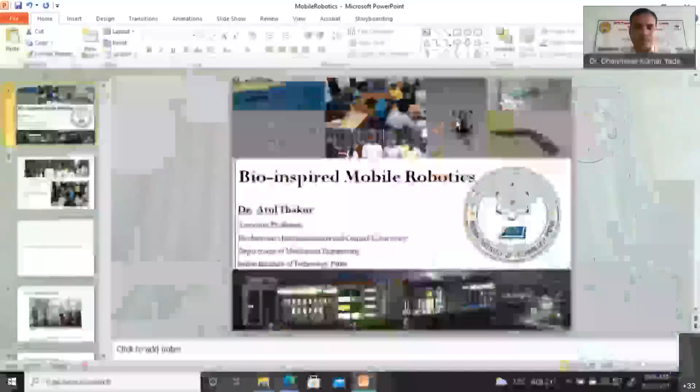A very good morning to all the participants and faculty members. The topic of today's talk is bio-inspired mobile robotics. My name is Atul Thakur and I'm an associate professor in the Department of Mechanical Engineering at IIT Patna. This is my group, and the vision of my lab is to design and fabricate smart, economical, automated robotic and mechatronic systems.

The present projects going on in my lab include bio-inspired robots for municipal solid waste sorting and magnetic micro-robotics, which I will give you some glimpse of today. So before I get into some of the research results from our group, I would like to introduce you to the field of mobile robotics.

Often what we consider as science fiction, in due course as time goes by, becomes reality. I'll give you an example. This is a picture from a 1920 play written by a Czech writer, Karel Čapek. In this play, he introduced some characters which looked like humans but were actually not humans. They were some machines. In those days, there were no concepts of robots. In fact, in that very play, the character that Karel Čapek introduced was called Robota. This word Robota in the Czech language means hard work or slave.

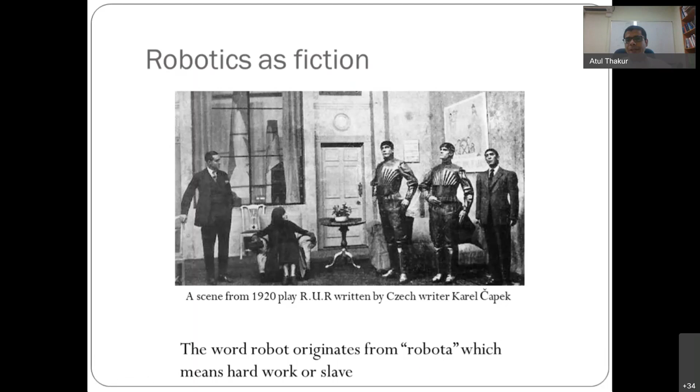It turns out that since then, 100 years have elapsed, and today we actually have some machines which have a human-like figure, which is no more fiction. So what was fiction then now has become a reality.

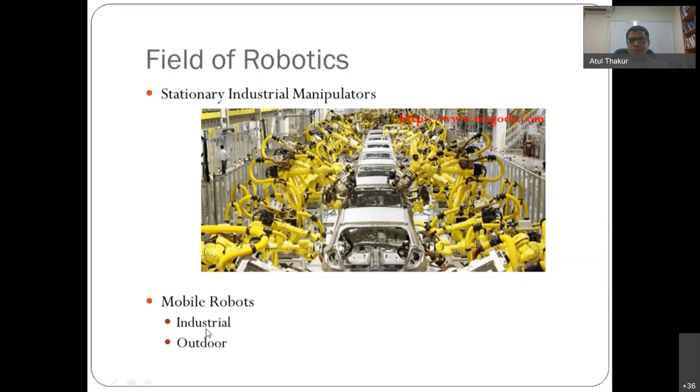They are called mobile robots. Mobile robots also fall into two categories - they can be either industrial or outdoor robots. Today we will be discussing mobile robots. A mobile robot is that robot which can move unsupervised in the real world to perform a given task.

So what do we mean by unsupervised? Well, if we have to give very minimal input or command to the robot, or in other words, if we have to give high level commands to the robot and the robot itself recognizes the low level commands, then we can say that it is unsupervised. To give you an example of that, let us say you have one remote controlled car.

You know the remote controlled car that children play with, those are toys, right? In those toys, you have two controls: one for acceleration in the forward direction, and another for steering, a joystick with which you can steer the wheels. So if I ask you to take that car from one place to another place, it will involve a lot of deft actions.

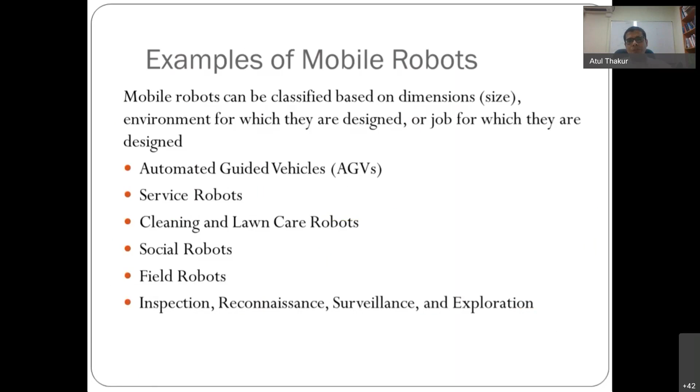So based upon the applications, mobile robots fall into various categories. It can be an automated guided vehicle, service robots, cleaning and lawn care robots, social robots, field robots, inspection, reconnaissance, surveillance, and exploration robots.

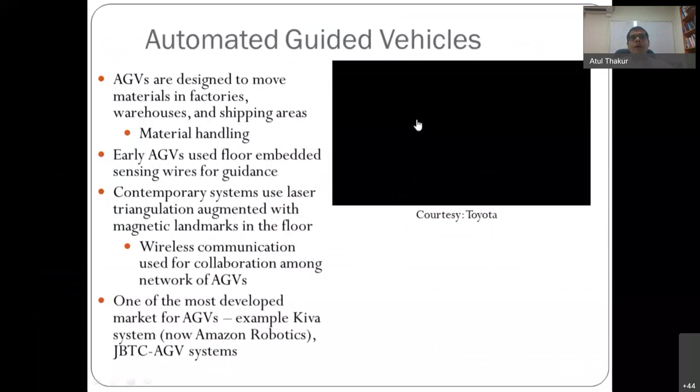So you can see this automated guided vehicle here. These are robots that can move in a factory shop floor and can be used for transporting materials from one place to another place. This is an example of the Toyota plant where you can see these materials being transported on vehicles which are driven by humans.

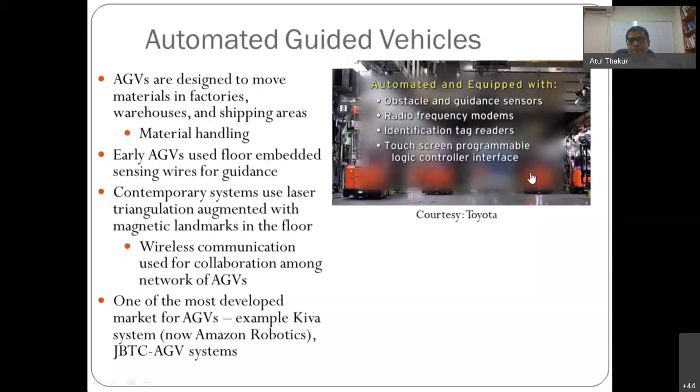But when humans drive these, it becomes much more difficult for them to perform these tasks and maintain that attention throughout the day, right? So instead of them, people are now using these automated guided vehicles where drivers are not driving them, but a computer is driving the vehicle. So these automated guided vehicles can transport materials from one place to another place in a factory shop floor.

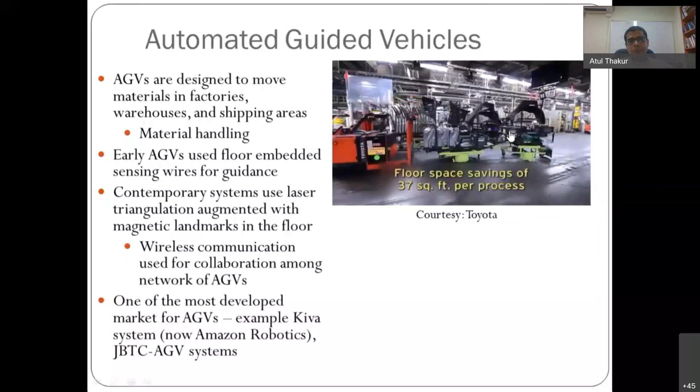In olden days, floor mounted wires or cables used to be used for locating these robots to determine their location. As opposed to that, now wireless localization is being used, which can be done by means of laser-based triangulation.

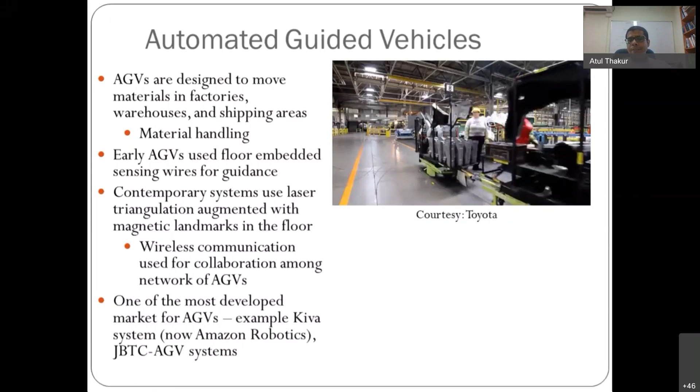So today, these kinds of robots are used in large warehouses for transporting materials from one place to another place. For example, Amazon is using these types of robots in its warehouses, and they have a dedicated wing called Amazon Robotics that does this development.

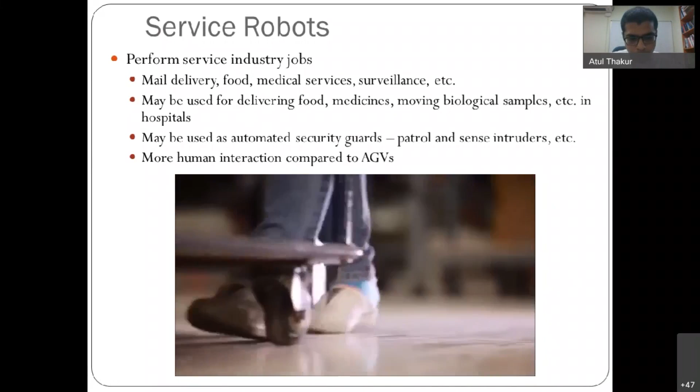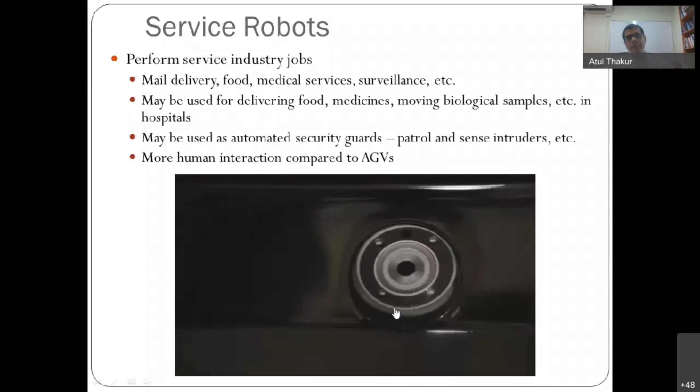Here you can see service robots that can transport materials, not in a factory, but in institutions where more people are working. Compared to automated guided vehicles, these service robots operate in environments where there are large numbers of people. For example, restaurants, museums, or hospitals where many people work. There, these robots can be used for transporting materials from one place to another place.

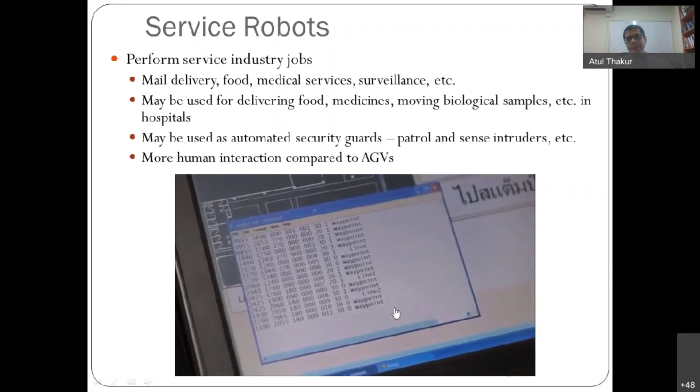So naturally, these robots have to be safer compared to automated guided vehicles. As you can see here, these robots can avoid obstacles, and their geometry is also such that when they collide with humans, there is minimum harm or damage.

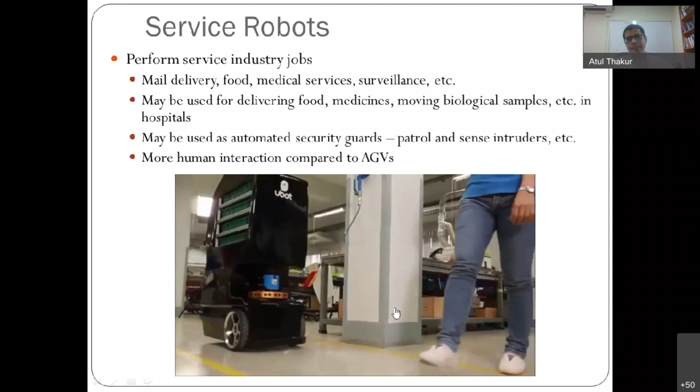It has more sophisticated obstacle avoidance capabilities. You can see that if inadvertently a human being comes in front of the robot, it is equipped with sensors that will stop it. You can see this, right?

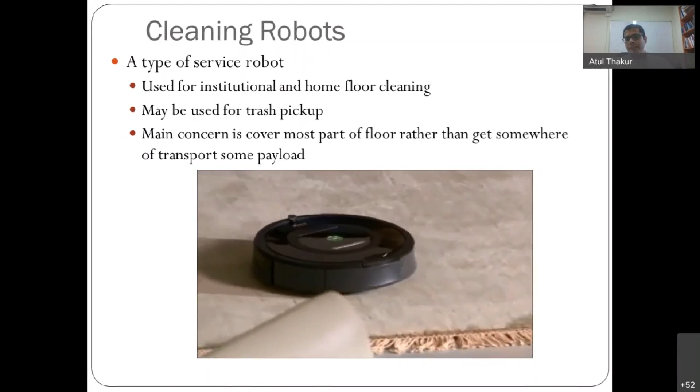Then the other category of robot includes cleaning robots. Nowadays, these robots are also available in India. These are vacuum cleaning robots that can move around in an unsupervised way. So if you give command to the robot for cleaning the room, it will perform scanning of the room, and then it will use its vacuum based cleaning device to suck all the dust.

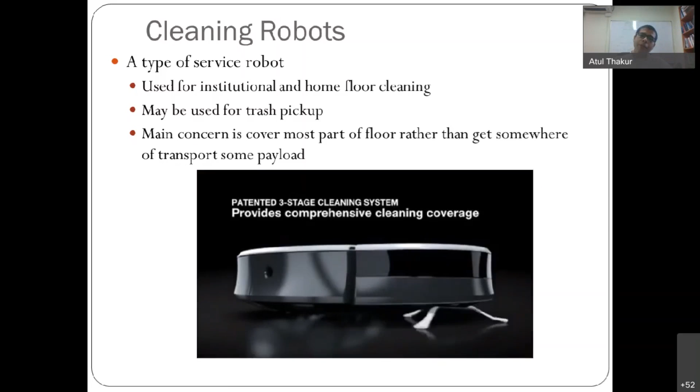Unlike the other category of robots, such as the automated guided vehicles or the service robots, where the target is to take material from one place to another place, here the objective is to cover as much floor as possible in as less time as possible.

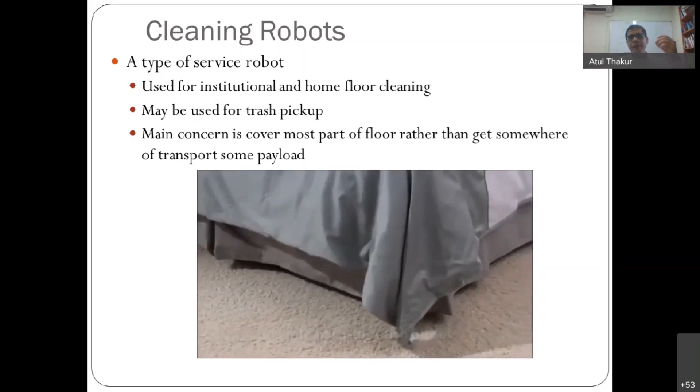So based upon the application, the way we program the robot also varies, right? In the case of service robots, the programming should be done in such a way that it should always avoid obstacles and at the same time take the material as fast as possible to the desired location. On the other hand, in the case of cleaning robots, the job is to perform coverage of a given area.

The other category of robots is social robots. In many countries, the population is aging very, very rapidly. For example, in Japan, a vast majority of population is getting older. So there, in order to provide care to the elderly population, robots are being used.

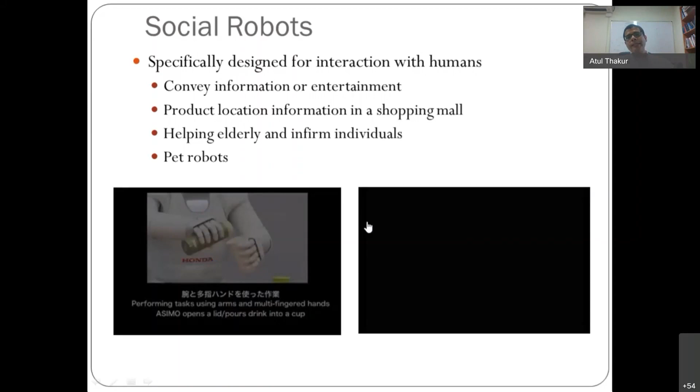These robots have to have a shape which looks much more like human, so that humans can easily interact with these robots. When we are talking about dealing with humans, there should be some kind of human interaction with the robot, and social robotics area is being developed keeping that in mind, where the robots can have human-like shape, they can have human-like movements, and sometimes even human-like gestures.

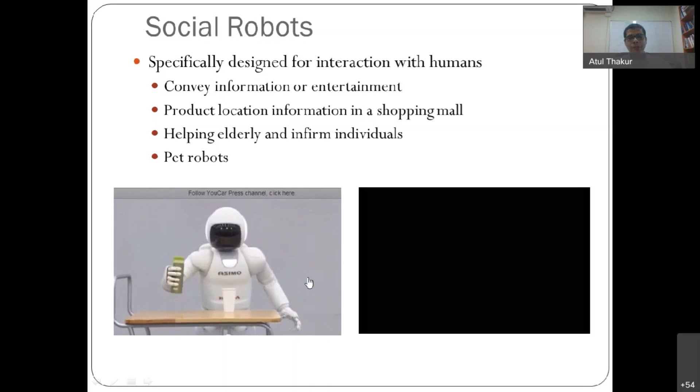As you can see that this robot, although it has a human-like shape, you can very easily tell that it's a robot, right? Because of its very robot-like motion. So nowadays, people are working on developing robots which are looking more and more like humans. There is a lot of need for research in this area.

Sometimes for entertainment purpose, these kind of robots are also developed, which can act like pets. This AIBO robot on the right hand side is a robotic pet.

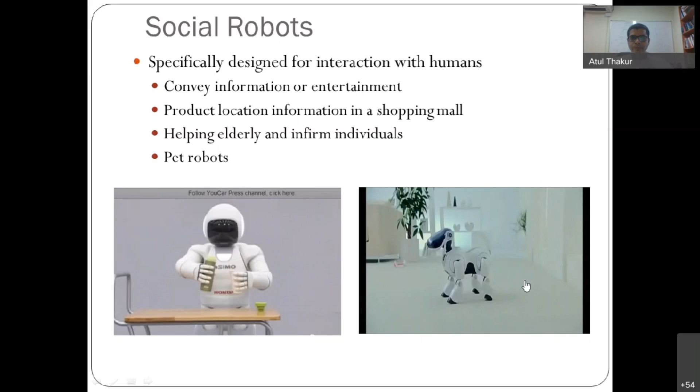So these are all robots that I have shown you, basically operating in a regulated environment. By regulated environment, what I mean is that we know about the environment. For example, if there is a pet robot, then it is operating in a domestic home-like environment, so we know what kind of obstacles are around it and what kind of surfaces are there. Or if we are talking about a factory automated guided vehicle, AGV, then we know the factory environment, right? We know what kind of floor is there and what kind of temperatures we are talking about and so on and so forth.

However, there are environments where we don't know about the environment. The environment is unregulated, for example like interplanetary exploration. We don't know about the Martian surface. So the robot should be able to take care of unknown dangers that may be present on a different planet.

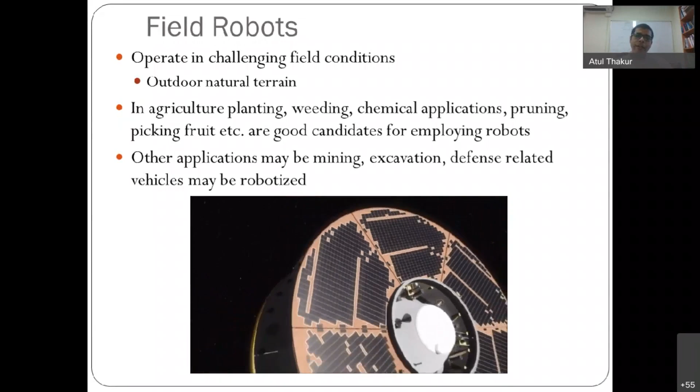It's not only about the interplanetary environments, but suppose there is an agricultural field where the robot is used for applying chemicals or disinfectants or pruning or picking fruits. There also the environment is primarily unregulated. We don't know the terrain, we don't know the softness of the soil and so on and so forth. Or in mines, for example, the environment is primarily unknown.

So all these types of robotic applications are known as field robotics applications. In field robotics, the way robots are programmed should take care of unknown environmental factors such as terrain, wind, unknown obstacles, moving obstacles, and so on and so forth.

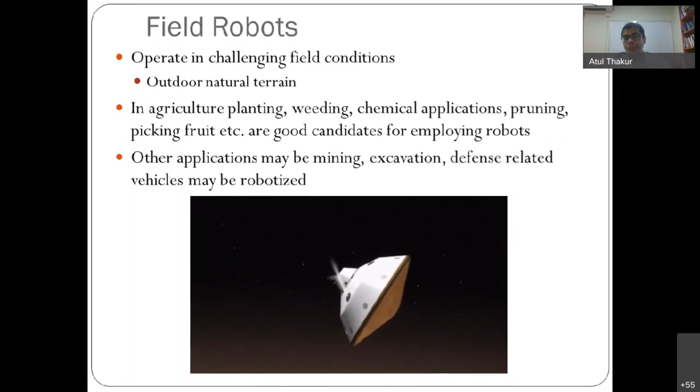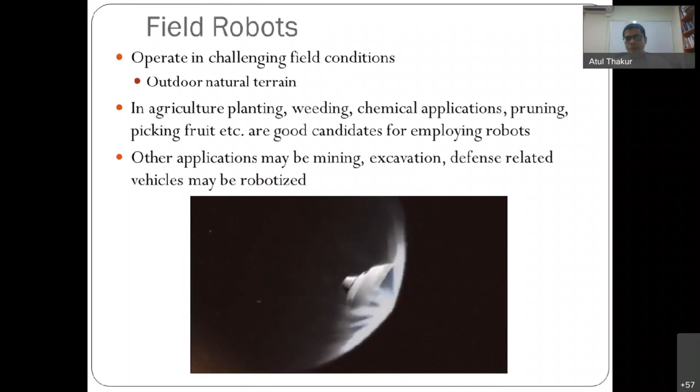Here in this animation, you can see the Mars rover which enters the Martian atmosphere, and eventually the rover lands on the Martian surface and starts exploring it. Obviously this is not a real video, it's more of an animation to give an idea of what is going on. But now we have available all these pictures from Mars sent by the Martian rover. This is how it might have fallen.

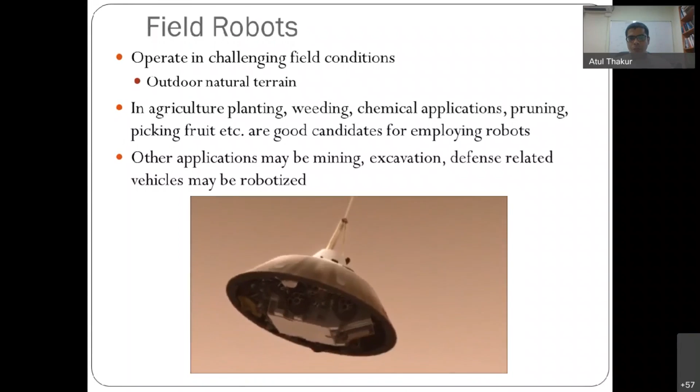So once this rover lands, there is no idea about what is the environment. In fact, the whole purpose of the rover going to the Martian surface is to find out what is there, right?

Now, you can imagine that the distance between Earth and Mars is very large. It's of the order of a few light minutes. That means that even light takes tens of minutes to go from Earth to Mars, and so do any other electromagnetic signals.

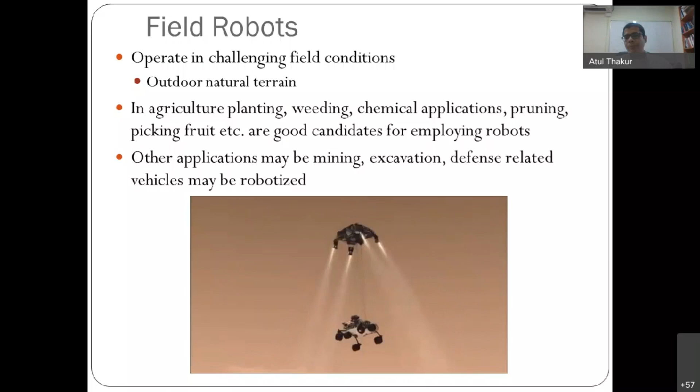Suppose that we want to operate this rover via remote control. By the time we give a brake command, the robot might have already fallen into a ditch. Therefore, the robot should be programmed with autonomous behaviors.

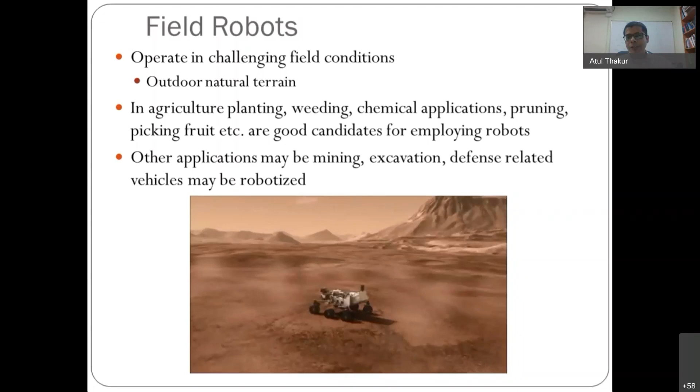From Earth, we should only be sending commands that are high level, meaning scan this area without falling into a ditch. The robot should be able to go around and protect itself from ditches, marsh, or any kind of soft terrain where its wheels may get stuck.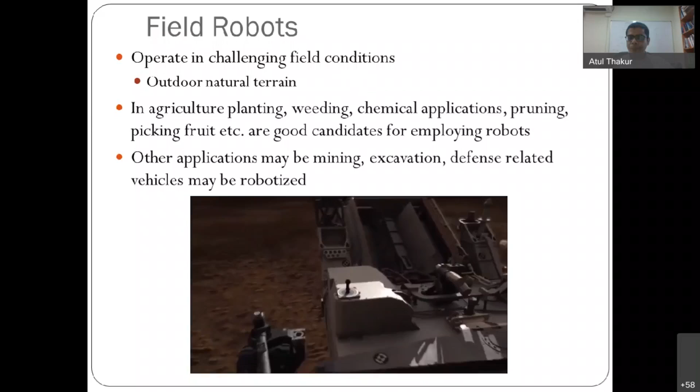It should also take pictures, and since it gets charged by solar power, it should seek places with high sunlight when the battery is draining. All these behaviors are programmed on the robot.

In a nutshell, mobile robots have three layers, or basically two layers plus the environment as a third. There is the software layer, which includes control, planning, mapping, and localization, and the hardware layer, which involves the robot structure, actuator, microcontroller, and sensor, and that interacts with the environment.

The robot structure is the overall structure of the robot, meaning whether it has wheels or legs, and what kind of shape and physical components it has. Actuators are parts that provide mechanical power to the robot structure, such as an electric motor that makes the wheels rotate, or a hydraulic or pneumatic actuator. Microcontrollers are hardware pieces that generate signals to make these actuators move.

Sensors are pieces of electronics that sense environmental effects, for example the inclination, the battery voltage, the temperature, and so on. Once this data is available from sensors and goes into the microcontroller, it has to be processed to generate a suitable signal for the actuator, and that processing is done by the software layer.

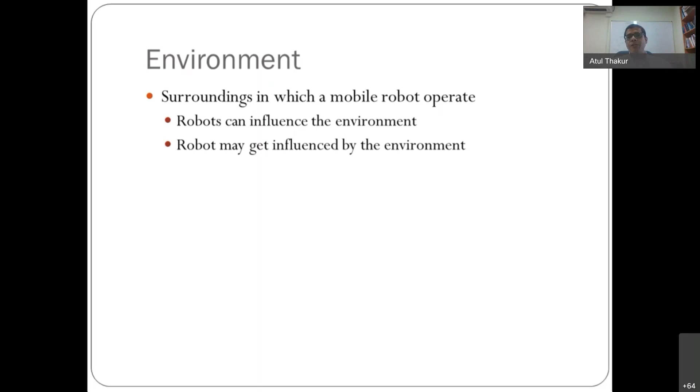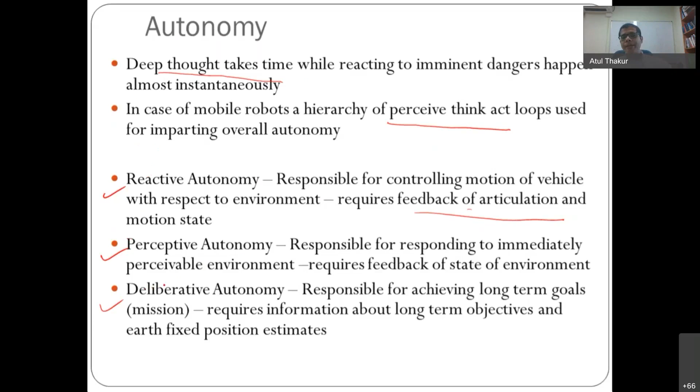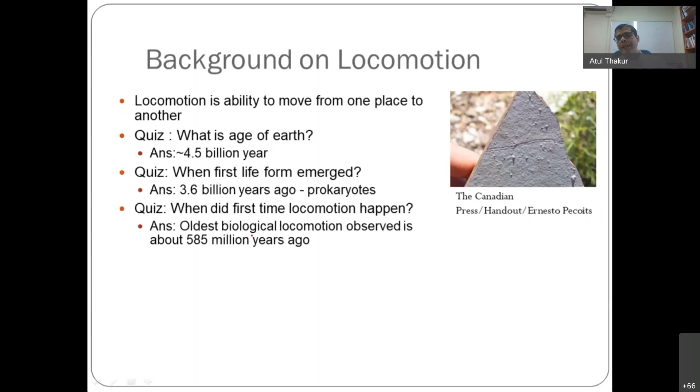Now let us look at robot locomotion. The Earth's age is about 4.5 billion years, and the first life form emerged about 3.6 billion years ago. Locomotion took place about 585 million years ago. In between, there was a process of evolution, and in these 585 million years, creatures evolved swimming, flying, crawling, and different kinds of locomotion patterns.

Humans invented wheels only a few thousand years ago. So it makes sense that since nature has evolved locomotion over 500 or 600 million years, we should take inspiration from the shape or body structure of creatures to develop robots or machines.

However, we cannot exactly copy animals or creatures because their mechanical complexity is very high, and creatures are made up of self-replicating cells, which we cannot make in labs. Moreover, the energy generation and storage mechanisms in biological systems cannot be replicated in machines.

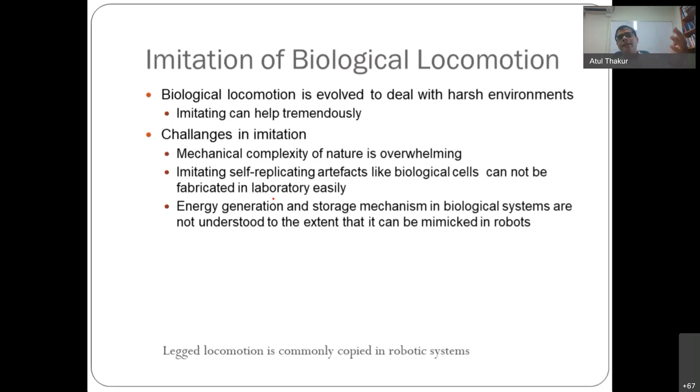Think about a small fruit fly, the one you see when you cut a fruit and leave it on the table. Even that small fruit fly can perform its own locomotion. It can get glucose or food from fruits and produce its own energy. On the other hand, the machines that humans develop have batteries, and the battery size is quite big, the form factor is big. So exactly copying creatures is not possible, but we can make a functional copy, and that is known as bio-inspiration.

There are different types of locomotion in nature used to develop robots. There is terrestrial locomotion like walking, galloping, running, hopping, crawling, sliding, etc. There is aquatic or waterborne locomotion like swimming and jet propulsion, and flight locomotion like flapping wing, gliding, and perching.

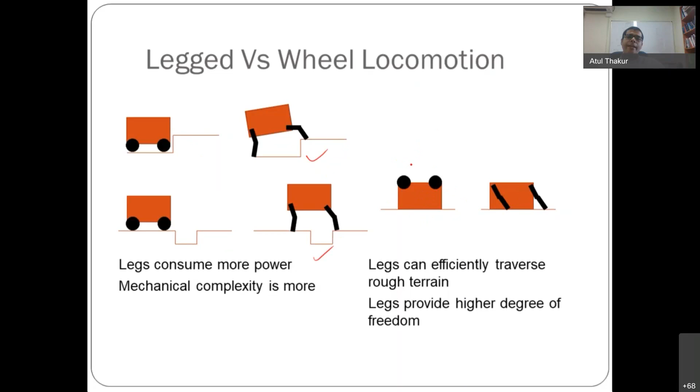So legged locomotion can go on uneven terrains like this, but wheel locomotion cannot. Wheel locomotion may not be able to recover from an upturned state, but legged locomotion can. However, wheel locomotion is more efficient, consumes less energy, less power. On the other hand, legged locomotion consumes more power.

If we look at an insect, as soon as it is born, it starts walking. If you look at a deer, it starts standing about 20 minutes after its birth. And humans, as you all know, take 1 to 2 years to start standing and walking. Why is that? An insect has 6 legs, so with 6 legs it can easily stand without any effort. It is more stable, statically stable, so to speak.

On the other hand, a deer is also almost statically stable, but it has lots of controls, muscles that it has to learn to control. Humans stand on 2 legs, also known as biped, which requires much more control effort that humans have to learn over 1 to 2 years. But with fewer legs, humans can perform much more complex motions, like gymnastics, pole vault, and other things you don't see insects or even quadrupeds doing.

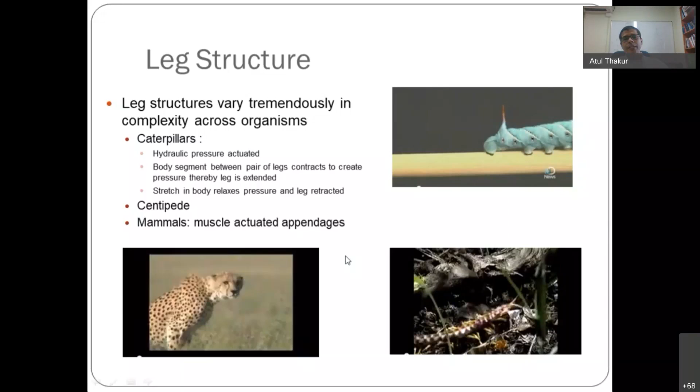On the other hand, we have the cheetah, which has a more complex quadruped structure, and all these legs are moved by means of muscles. It can gain a maximum speed of almost 80 miles per hour, and at that speed it can perform lots of complex motions. Then we have creatures like a centipede, which moves with hundreds of legs, but each leg performs a very simple motion.

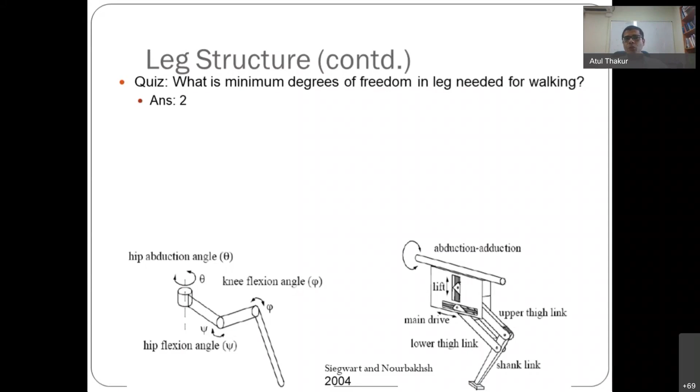In general, the minimum degrees of freedom in a leg needed for walking is 2: one for lifting, another for swinging. If we look at our own legs, they have more degrees of freedom than 2. For example, at the ankle, at the knee, and also at the thigh there is a degree of motion. That's there for additional control, for higher maneuverability.

But the more degrees of freedom, the more the mass increases, control effort increases, energy requirement increases, and design complexity increases. In general, legs can be designed with revolute joints or slotted joints, so this goes up and down and this goes sideways, and that way the leg can be controlled, or both joints can move in a rotary manner.

Now I'll show you some robots that copy biological locomotion. Here you can see hopping. As such, you don't see hopping directly in nature, but you might have seen kangaroos which hop on their rear legs, or small children who join their legs and hop around. This robot actually performs that kind of locomotion.

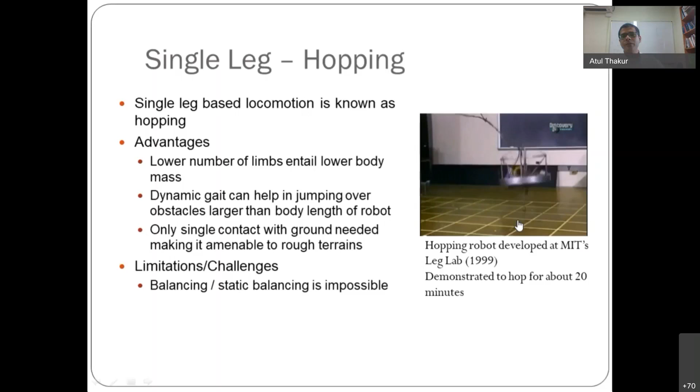So here the mechanism works like this. You have this projection on a wheel which rotates and stretches this elastic component and stores the elastic energy. And at the extreme, this is released, and because of that, the hopping motion is generated.

So with this kind of hopping motion, only a single point of contact is needed with the ground, which helps in jumping over uneven terrains. However, static stability is not possible. That means this robot cannot stay without moving.

It has to keep moving to stay. So these are bipeds, like Honda Asimo, which I have shown you in the video. It has two legs, and with these two legs, it can move around. Or we can have multi-legged locomotion. Here you can see these legs, out of which some legs are in contact with the ground while some are off the ground.

You can observe that a minimum of 3 legs are needed for stability. That means there should be 3 legs in contact with the ground so that the robot can be statically stable. So here you can see these 3 legs or 3 points of contact. If you connect all these points of contact, what you obtain is called a support polygon.

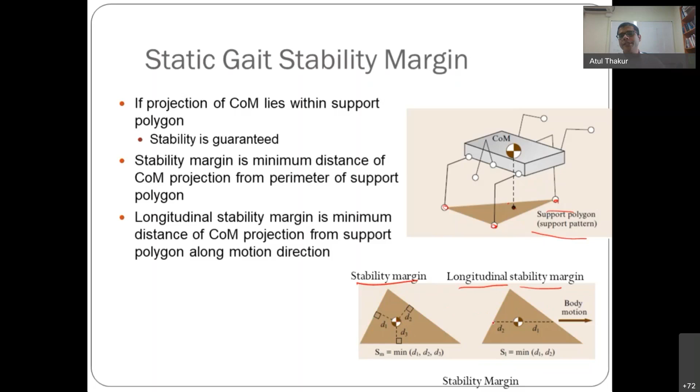If the stability margin is more, the robot is more stable. If the stability margin is less, the robot can be easily made to fall. We can also define longitudinal stability margin. When the robot moves, we can find the direction of movement, and along that direction, the shortest distance from the edge is called the longitudinal stability margin.

So quadruped robots: quad means 4 and ped means legs. So if a robot has 4 legs, it is called a quadruped. A minimum of 3 points of contact are needed for static stability, so you can imagine these can be statically stable.

However, please note that when the leg is lifted up, the center of mass shifts. So the posture of the robot has to be changed in such a way that the projected center of mass is always guaranteed to lie inside the support polygon.

So suppose this triangle is the support polygon that I'm showing you. Then the programming of the robot should be done in such a way that its center of mass, when projected onto this plane of the support polygon, is always ensured to lie inside the support polygon.

So this is a representation of the gait of the robot. Please note that this is not G-A-T-E gate, this is G-A-I-T gait. So gait means how the robot's legs move basically.

So here you can see this diagram which shows the legs of the robot. The empty bubbles mean that the leg is off the ground, that it is not touching the ground but above it. And when this bubble is filled, we say that particular leg is on the ground.

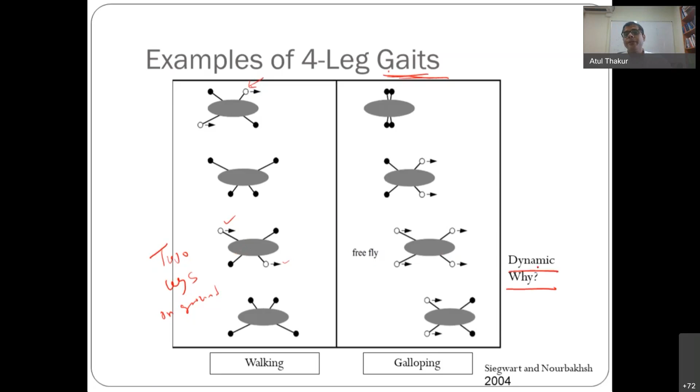Here you can see another type of gait where the front two legs are above the ground, then all the legs are above the ground, meaning it is completely in the air. Then the front two legs are on the ground and rear two legs are off the ground. Finally, all the legs are on the ground, and this cycle continues like this.

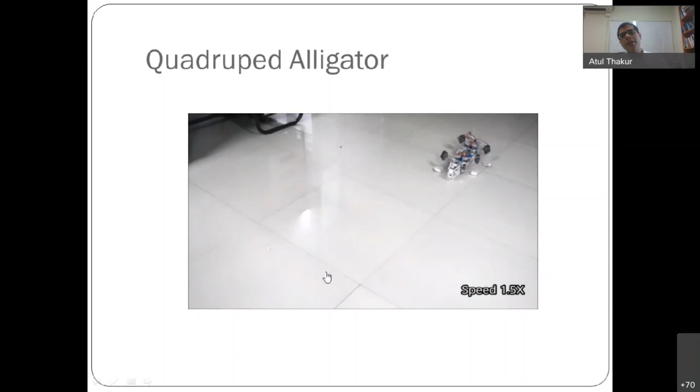Here you can see one example of an alligator robot developed in our lab. This robot is able to move on the ground. It can turn around, and so on and so forth.

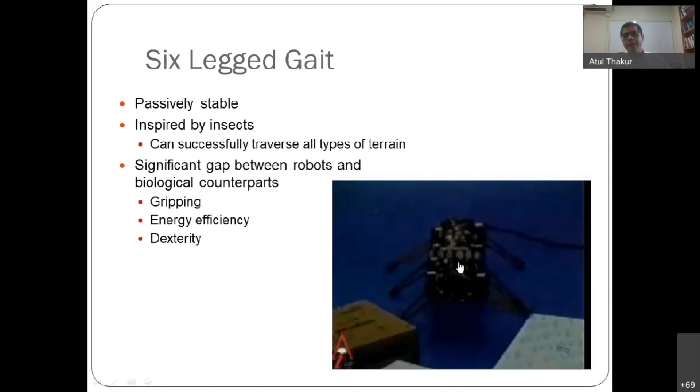Then these are six-legged gaits. Here a robot has 6 legs, and with 6 legs it is able to climb more uneven type of terrain. With 6 legs at a time, minimum 3 legs are always on the ground, so it is a statically stable gait, also called a passively stable gait. This kind of locomotion you often see in cockroaches, where they have 6 legs and 3 legs are always in contact with the ground.

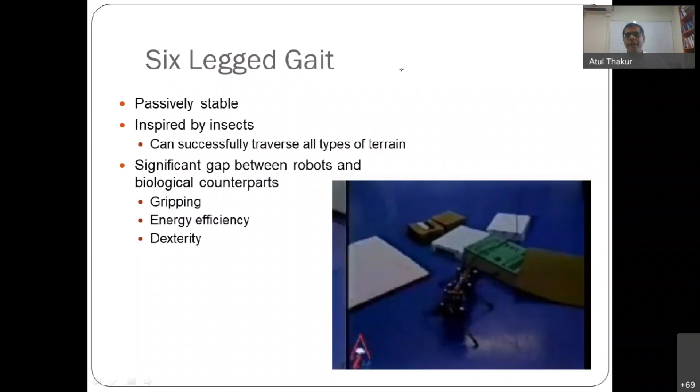So suppose we have the 6 legs. You can see that the middle leg on one side and the front and rear legs on the other side are in contact with the ground, and then all of them are in contact with the ground, and then it is swapped. Here you can see the swapping. So this is a 6-legged gait.

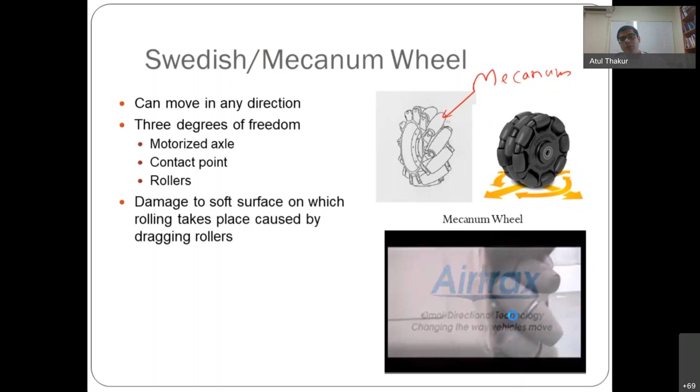Then we have the Swedish wheel, also called a Mecanum wheel. This is similar to a standard wheel, except that on the periphery of this wheel there are these rollers known as Mecanum wheels, which you can see over here also. These are passive rollers, meaning they are not moved by a motor, but because of this, the robot or vehicle is able to go in any direction.

You can see that this can even slide sideways. The only limitation of these kinds of wheels is that it is more complex, and it can damage surfaces because of the presence of the rollers.

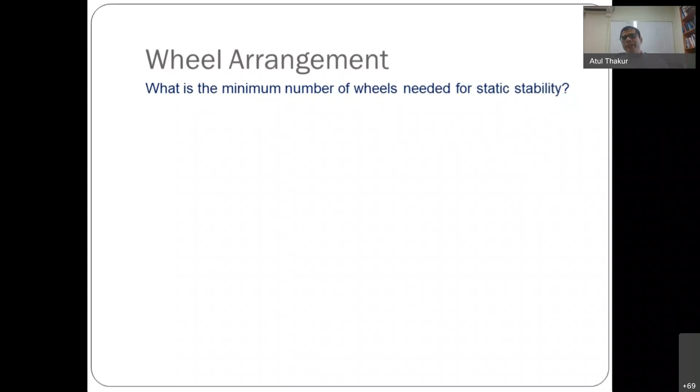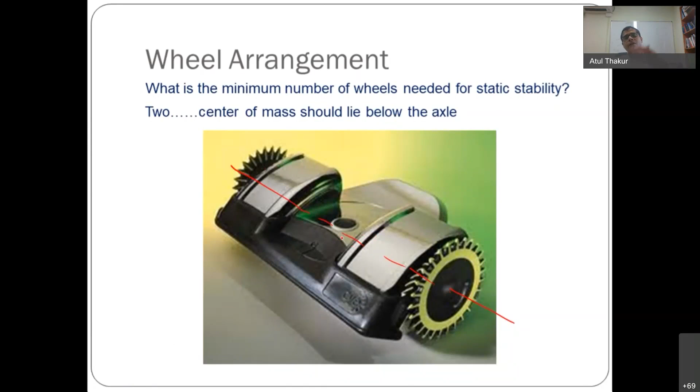So what is the minimum number of wheels needed for static stability? One may think it is 3, but it turns out it can be 2 in a special case when the center of mass lies below the axle. This is an example where there are only 2 wheels, designed so its center of mass is below the axle - axle meaning the axis passing through these wheels. If the center of mass is below this axle, then it will be statically stable.

Omnidirectional drive can have 3 Swedish wheels put at 120-degree phase lag, and with that it can actually go in any direction.

So for static stability of a 3-wheel configuration, the center of mass should lie within the triangle formed by the contact points between the wheels and the ground.

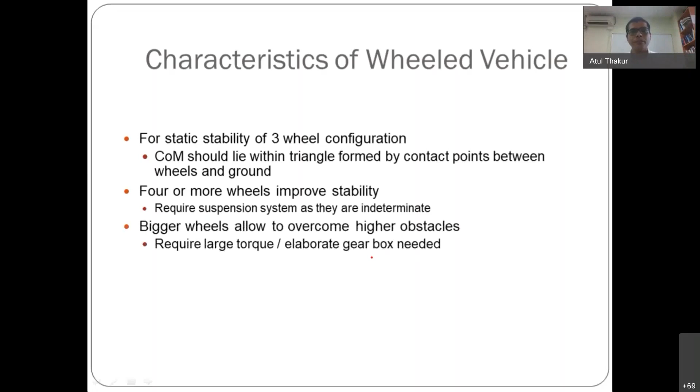If there are bigger wheels, then higher obstacles can be overcome, but it requires larger torque and an elaborate gearbox. More arrangements—most of the arrangements are non-holonomic.

That's something beyond the scope of this 2-hour lecture right now. But non-holonomic constraints involve some non-integrable constraints, and most of these wheeled systems will have non-holonomic constraints that make control a little involved.

So if we combine actuation and steering on one single wheel, then we say that the vehicle is under-actuated. It requires more complex control scheme.

So what we have seen is that if we use legs in a robot, it can go on very complex terrains. But legs provide poor efficiency, or higher power consumption.

Wheels move uniformly, therefore giving better efficiency. However, they cannot go on all types of terrains. For example, wheels may get stuck in sand, or may not be able to go on highly uneven terrains.

So can we get the best of both worlds? It is possible by using rovers. So here you can see a rover.

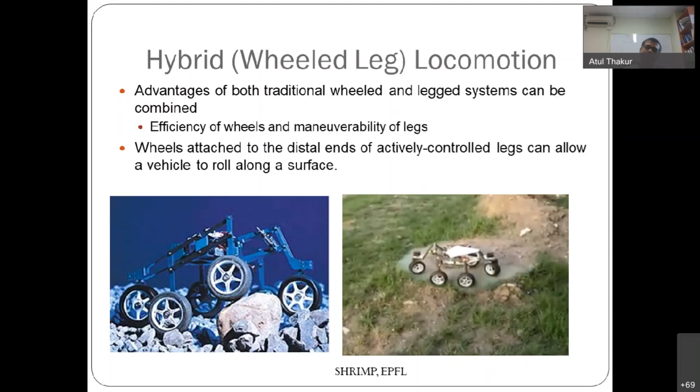Well, in engineering there is no free lunch. If you are improving in terms of efficiency and terrain traversability, then you are doing worse in terms of design complexity.

With that, rovers are more complex to design actually, and will be more expensive. So that's the reason they are used mostly in applications where funding is not an issue.

For example, the Mars rover. You just want to send one Mars rover to the planet Mars at this point of time, so a space agency has a lot of money and can spend it on this kind of sophisticated locomotion. But you cannot have a car built this way, because many of them have to be manufactured.

So now let us look at crawling-based locomotion and the corresponding robots that have been developed, keeping in consideration crawling. Snakes and worms perform crawling-based locomotion.

Snakes are vertebrates. They have 100 to 400 vertebrae. You can see this vertebral structure here. In fact, it has a very long body, but it has only 3 types of bones: skull, vertebra, and ribs, although there are a lot of them.

So the stretchability of the backbone is very less actually. They are not elastic, but they are very flexible.

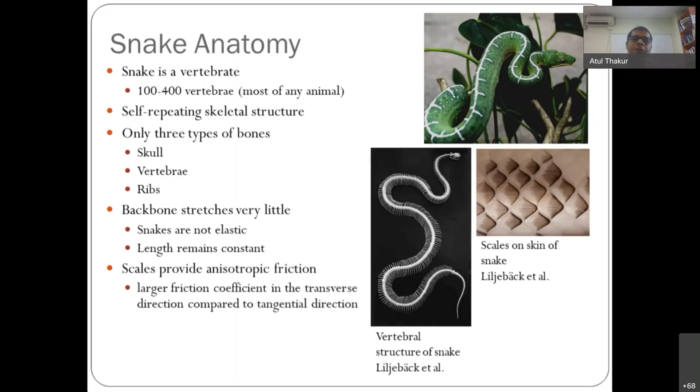Snakes use various cyclic forms of locomotion like lateral undulation, concertina, rectilinear, and sidewinding, and then there are others like slide pushing, jumping, rolling, climbing, swimming, etc.

This S-shaped wave moves from head to tail, and it keeps on happening. If we take a very small element of this snake's body and pay attention to the friction force experienced by it, the normal reaction is perpendicular to the ground. So the friction force will have two components: one along the body, and another perpendicular to the body or perpendicular to this element.

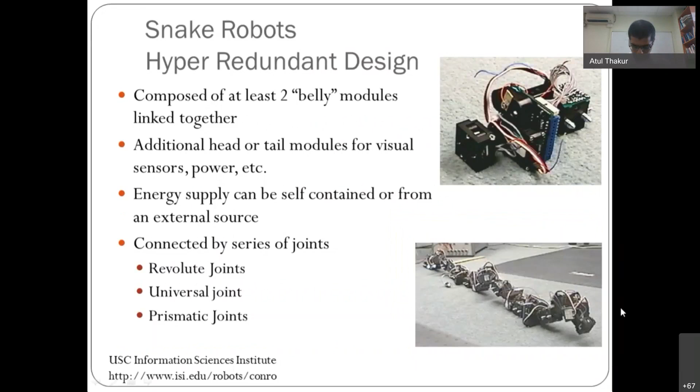So here you can see the concept of hyper redundant design. What do we mean by hyper redundant design? What is the meaning of the word redundant? Redundant means something which is more than necessary.

For example, let's say there is this frame of reference, and in this frame of reference suppose I want to put a point. How many variables do I need to describe this point? Well, I need x, comma y - two variables. So it has 2 degrees of freedom. You can imagine this point to be like an ant, which can move along the x-axis or y-axis or a combination, but it cannot rotate if we are looking at a very tiny point.

But now suppose we have one more point, described by x dash and y dash, and both points can move in any direction - then there are 4 degrees of freedom of this system. But suppose we join these 2 points with a line, and say this line is rigid - like two ants trying to carry a long rod. Then because of this additional constraint, there are now only 3 degrees of freedom: 2 plus 2 is 4, minus 1 constraint is 3. And it's true, because you need to specify the location of any point on this line and its rotation theta.

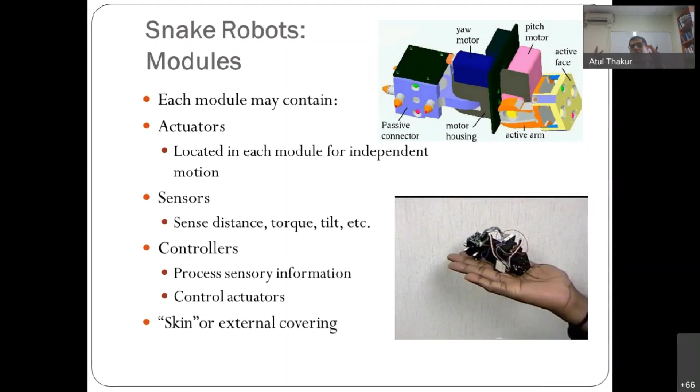And then we have an example of self-reconfigurable robots, where the long snake body can break down and connect in different ways. For example, it can make itself like a legged robot, and so on and so forth.

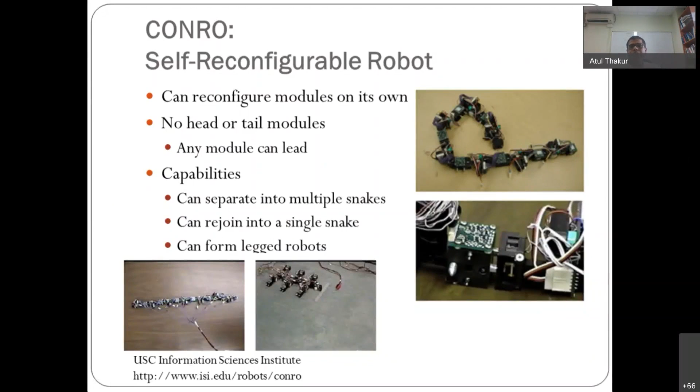So why do people bother developing snake-inspired robots? What is the reason? If you have a scenario where robots have to perform search and rescue in an earthquake, victims may be stuck in some place, and if you move things too much, you may actually harm or damage them. So it's very difficult to search for victims. Therefore, these very narrow snake-like robots can go into nooks and corners and can identify or detect the stuck victims, so that some action can be taken.

Any questions till now? One participant has written a question in the chat box. I think he has written: what is the role of robots in electrical engineering?

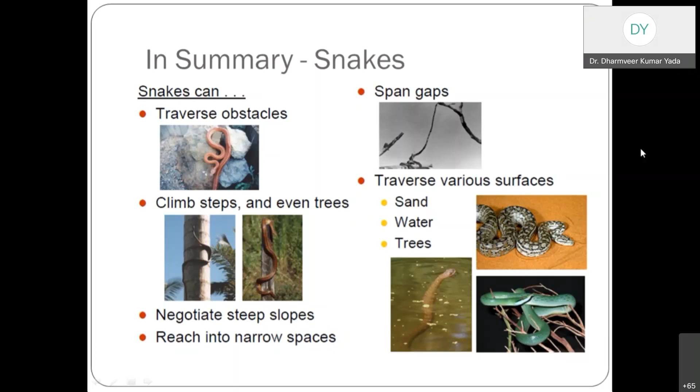Any other participants have any questions? Okay, so then let's try to cover some more material. There's two hours, right? So let's take some more things.

So then there is worm-based locomotion. This means you have seen different types of worms. Usually, this is a very simplistic description, but you can imagine a worm to be like a cylinder. If you stretch a cylinder like this, what happens to the diameter? The diameter will reduce, it will become less. So if volume is written as pi r squared L, then dr by dl will be minus r by 2L. So as the length increases, the radius reduces.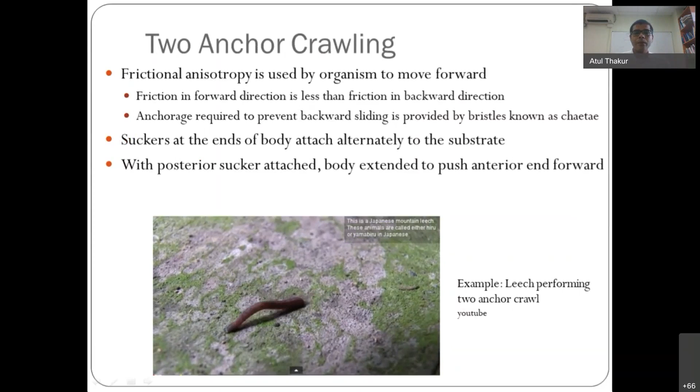In fact, the similar thing is observed in different types of worms. Here you can see an example of two-anchor crawling, seen in a leech - in Hindi we call it a jonk. This has two anchors at the front and at the end, known as suckers. These suckers have frictional anisotropy, because of which the friction in the backward direction is much higher and in the forward direction is less. So what it does is stretch its body - as length increases, radius reduces - then it sticks its front sucker on the ground and contracts its body.

And that is how it performs movement. This is one form of worm locomotion, called two-anchor crawling. Then a caterpillar may show three-anchor crawling. I showed you a video of a caterpillar where there are three anchors - some legs in the middle, one in the back and one in the front. By alternately moving these, the caterpillar can move ahead.

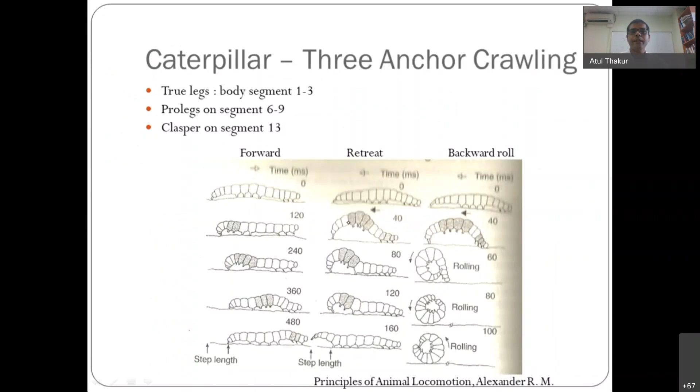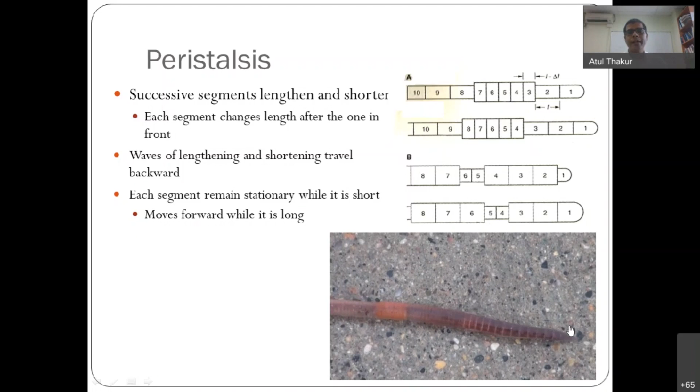Then the third variety of locomotion in worms is called peristalsis, seen in earthworms. Here you can see that a wave of expansion and contraction goes through the body. Let's look at this animation - some of the front segments are contracted, and in between there is stretching of certain segments. This wave of contraction and expansion goes through the body from front to back, and based upon that it crawls, not walks.

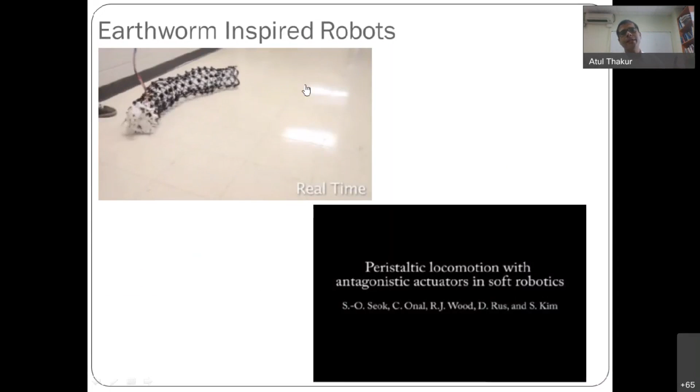So there are various robots inspired by this worm locomotion. Here you can see this earthworm-inspired locomotion - this motor is used, and this special mechanism is made with which the waves of expansion and contraction go from front to back. By means of that, there are points of contact where the friction is anisotropic, with which it can move on the ground and go ahead.

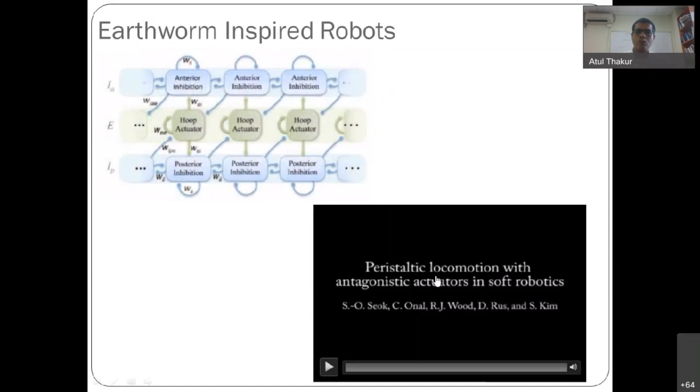Then there is another example of peristaltic locomotion. Here, shape memory alloys are used, so they don't use motors. Rather, they use what is called a shape memory alloy, which are like wires for performing actuation. So it is very robust actually. Unlike motors, there is nothing to break here. It basically actuates by means of wires.

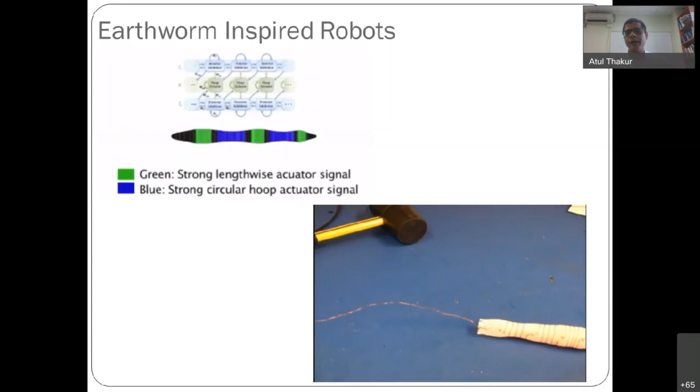Then there are aquatic locomotion. Aquatic means underwater locomotion, so underwater creatures are fishes. If you pay attention to any fish, they have two types of fins: caudal fin and median and paired fins. Caudal fin is like the tail fin, and then there are median and paired fins which appear in pairs. So by means of undulation and oscillation of these fins, the fish can move.

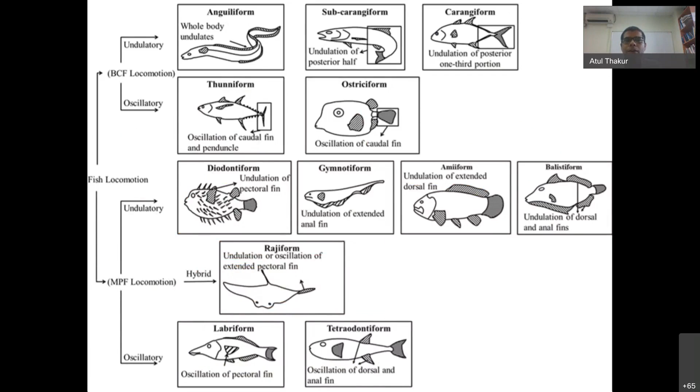So these are various types of locomotion found in fishes, based upon undulation of the body, oscillation of the body, and undulation and oscillation of the median and paired fins. Without getting too much into details of this, let's look at some examples.

This is known as anguilliform locomotion, where you can see that the body is undulating. This is also a kind of fish. The amplitude of oscillation at the head is much less compared to the tail, and these waves go through the body, and by means of these undulatory waves, the fish produces propulsion.

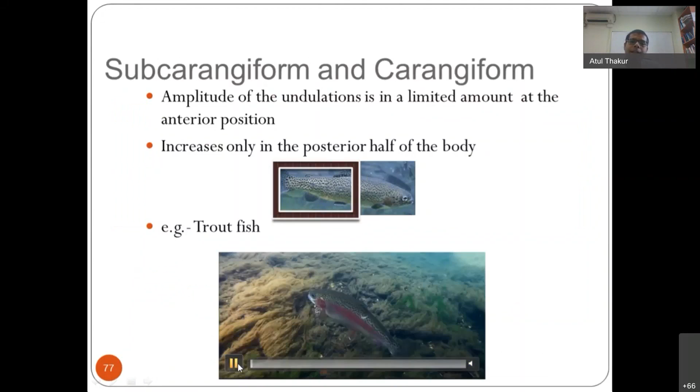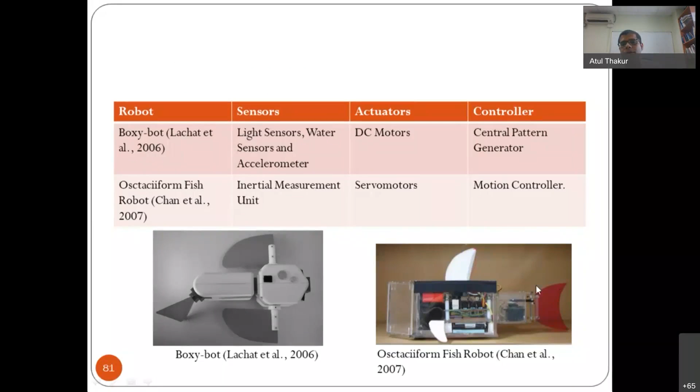So these are various examples. And then this ostraciform type of robot has oscillation of the tail. This is seen in boxfish, where the tail is oscillated, as you can see. So that kind of fin is provided on a robot, as you can see here. Over here also you can see the tail fin which oscillates, and by means of that it moves.

Then there are these paired fins, as you can see here. These fins on the side are undulating, right? So likewise, we can have this representative robot where you can see this pair of fins on the side.

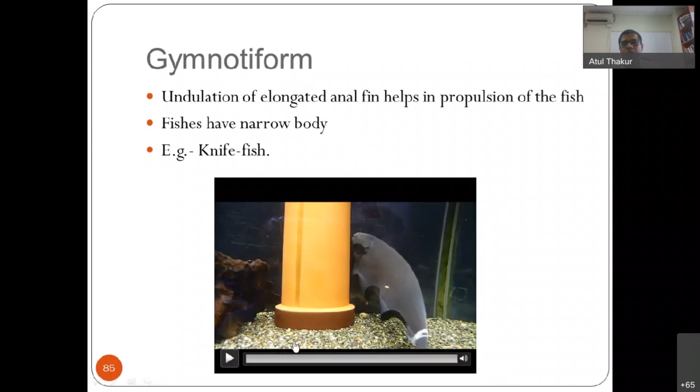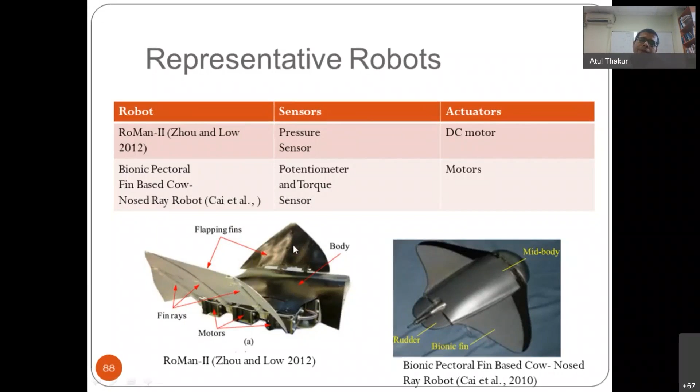fins perform both undulation and oscillation at the same time. So this kind of locomotion is also implemented in robots where you see these fin rays that are fabricated, and then it can perform locomotion by both undulation and oscillation of the fins.

So in a nutshell, the key challenges of mobile robotics lies in the design of robots. I've shown you various examples of animal locomotion and how they can be used in developing robots. Why would one use animal locomotion for developing robots? Well, animals are very successful in their environment, and suppose we want to send a robot into a certain environment, then we would like to develop our robot based upon the animal that lives in that environment.

So suppose we want to send a robot in a sandy environment, in a desert, then we might look at the camel, for example, which can easily move in a desert environment. And we should develop a robot copying the good features of the camel that allow it to move in the desert.

Or if we are talking about very deep oceans, then if we want to send a robot there, we should look at the fishes that dwell at that depth, because the fishes survive the high hydrostatic pressure because of the depth. So the robot should also be developed based upon how these fishes overcome this high hydrostatic pressure.

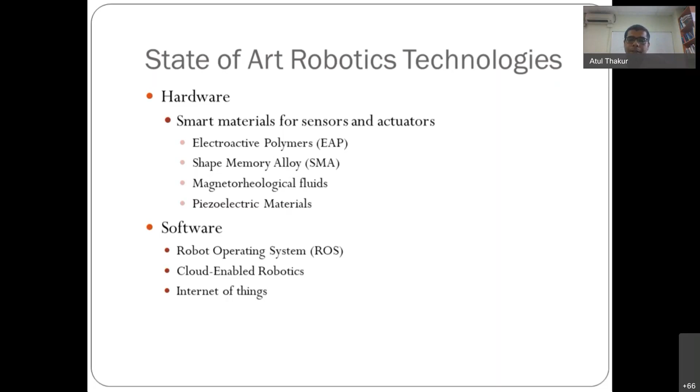So these are different state of the art technologies. The field of robotics is very useful for different applications. For example, these kind of big dog robots that were developed by Boston Dynamics were inducted into the US Army. So nowadays humans may be replaced in many dangerous places by robots - humans do not have to risk their lives.

In many places in the world, self-driving cars are becoming a reality. In fact, not only are people working on self-driving car technology, but now even the insurance and regulating authorities are preparing for self-driving cars. So you can imagine, even people who are working in law or legal areas - it's a problem for them.

Suppose self-driving cars come on the roads. It may be very difficult on Indian roads, but on many international roads, or in highly developed cities of India also, it is possible. So when that comes, let's say some car meets an accident - who should be held responsible? Because there is no driver sitting in the car. Should we hold the car company responsible, or the programmer of the algorithm, or the company that is providing that algorithm?